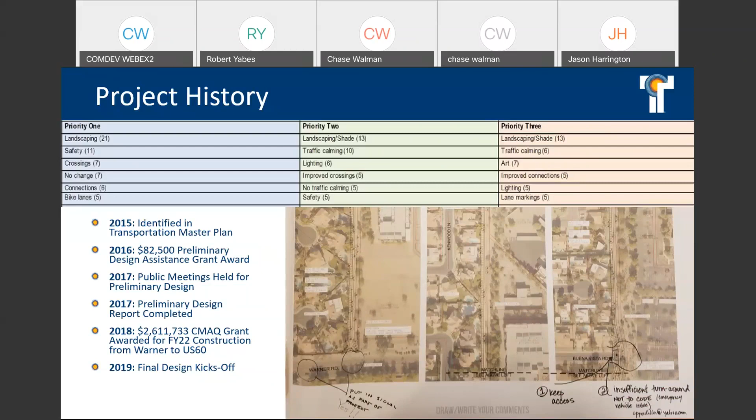So in 2018, we competed for federal construction funding in the form of a CMAQ grant, a Federal Highway Administration grant, and we were awarded just over $2.6 million for construction of the project, slated in fiscal year 2022. We started the final design in 2019.

As I said earlier, we were anticipating holding this first meeting in March. It got delayed, obviously, so now here we are in September holding our first round of public meetings.

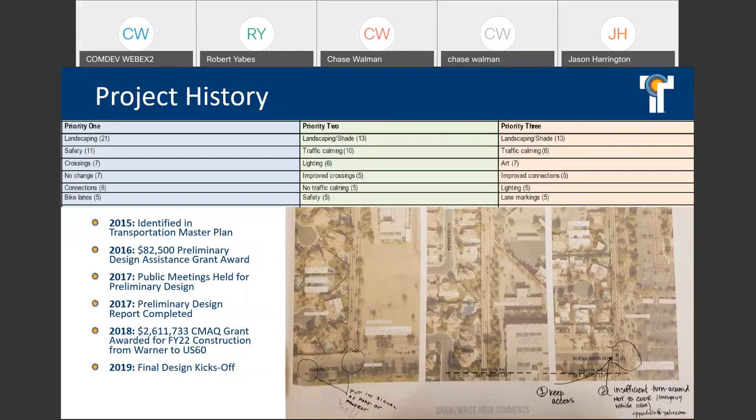This video is going to be a flyover view showing the whole project corridor, starting at Warner Road and continuing north. This is the area of ASU Research Park and the proposed future signal.

Now we're approaching Elliot Road and Shutterfly Way, near the Discovery Center. And now we're approaching Western Canal and then Country Club Way.

And now we're approaching Watson Drive. This is where we make a right turn and continue east for a little bit, going around this curve. We're now in the Optimist Park neighborhood.

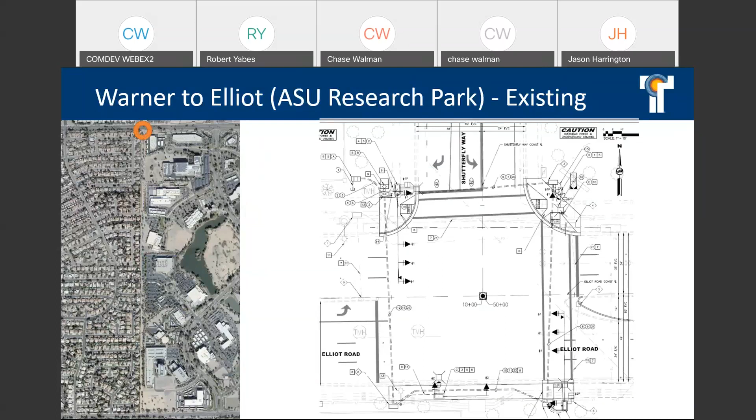The other side on Warner Road, this is showing the existing condition here. You can see a bicyclist on the right of this image trying to make the connection across, but this is the location of the future proposed signal at Warner Road, which would be in the scope of this project.

So with that, for this Warner to Elliot Road section, we have two proposed alternatives: the circle alternative and the square alternative. As you can see from the photo, the circle alternative has a multi-use path shown on the west side of that easement. It's called out to be a 10-foot concrete multi-use path, which is our city standard. In addition, it would have a buffer to the west, which would be occupied by the required lighting.

As with all of our projects adjacent to homes, as far as our specified lighting, we would include a back shield to reduce any backspill into the yards adjacent to these light poles. On the right is where we would have another buffer with an opportunity for additional landscaping, as well as an equestrian trail just east of that.

On the square alternative, it's basically a flip-flop of that. You'll see that more buffer space is provided on the square alternative, between the block wall and the concrete multi-use path, and some of the other required amenities like the lighting, for example.

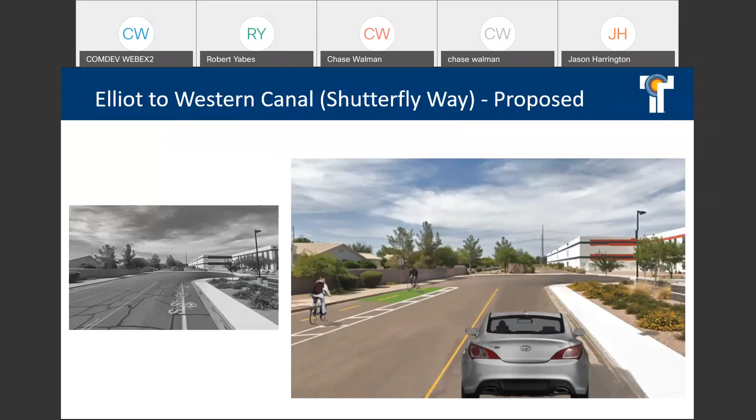This is a photo simulation of what a two-way cycle track could look like along Shutterfly Way. It would involve restriping the rest of the roadway, but would allow for a buffer space. The bicyclists would be on the same grade as the vehicles, and with this we would still be maintaining about 16 feet.

This alternative is showing what a side path could look like, taking bicyclists on a different grade, on the sidewalk grade instead of the vehicular grade, sharing a 10-foot concrete pathway leading to the Western Canal. This is a cross-section view showing the buffer space widths and the two-way cycle track.

The top alternative is not showing any striping, but it would be assumed that the existing striping to date would be maintained. This is a flyover plan view of those alternatives.

And showing the existing or future signal at Elliot Road and what that connection would look like, taking users from the east side of the street to the west side to our improvements. We would like to keep the improvements on the west side due to the lack of driveways seen on that west side.

This is showing existing conditions now, working from Western Canal, from Guadalupe Road to Western Canal. This is one of the wider corridors we have along the segment, giving us the opportunity to have dedicated bicycle facilities along this section, as well as the opportunity to introduce buffers. You can see the existing condition here of the wider corridor.

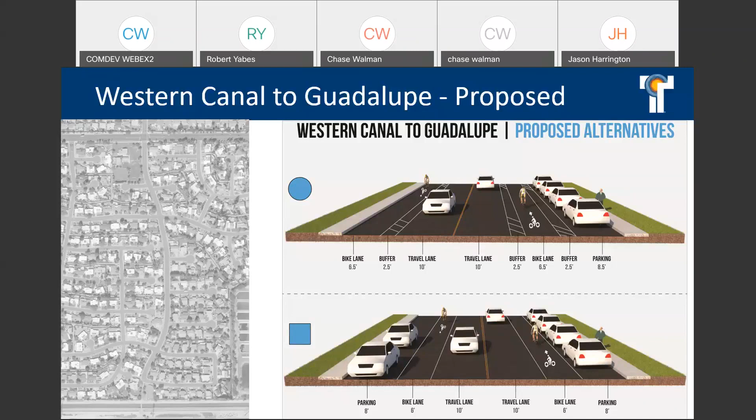We'll show a plan view of a side-by-side to give an idea of what that buffer would look like, as well as the parking on both sides of the street.

And now we're nearing the Western Canal connection on the south.

This section is our second to last section. This is Guadalupe to Watson Drive, where we have a bit more room than the section to the north, so you'll see two different alternatives here. The existing condition shows a 44-foot curb-to-curb distance, so all these improvements will be working within the current street section. Here we see two large travel lanes, on-street parking is allowed, and we also have some additional traffic calming with speed humps.

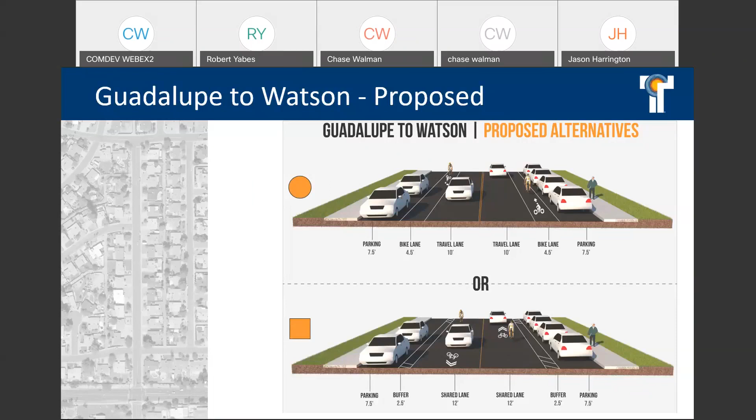Okay, going right into this is our final section. This is working from US 60 to Watson Drive. This is our tightest section where we only have 40 feet available curb to curb width, so our opportunities to add a dedicated bicycle facility here are just not possible.

So we're proposing two different alternatives that introduce a shared lane to this section, but for this section we would be maintaining both sides of on-street parking. This is as we just passed Baseline Road, and we're working our way towards the area of Fuller Elementary and Optimist Park. We have Fuller Elementary here on the right, and our soon-to-be improved El Paso multi-use path project is going east to west at that location.

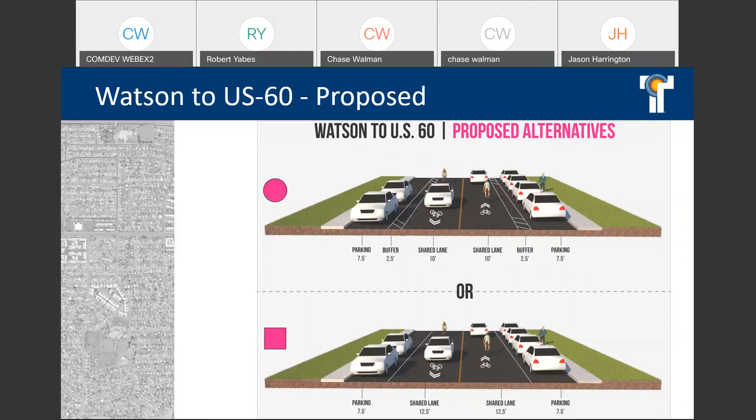So again, working from US 60 and working our way south to Watson Drive. On the right, you can see the double lines indicating the buffer zone in between the parked cars. On the left, you have a wider lane for those shared uses of the bicyclists and vehicles.

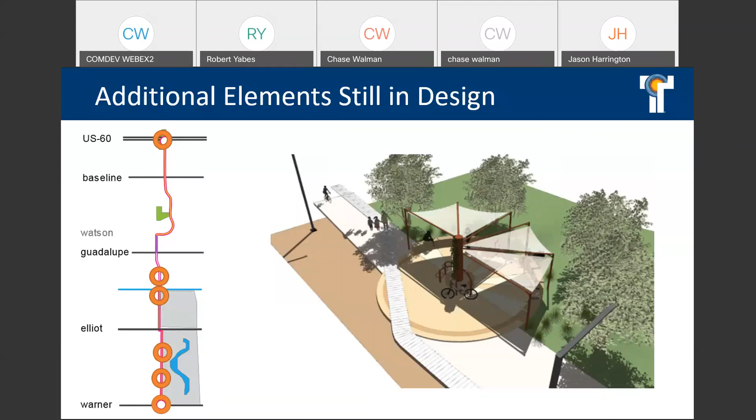Great, thanks Jason. And this is a placeholder—this is showing from one of our other previous projects what the landscape palette looked like for that project. So Jason will be working on the landscape design as well as we move forward.

So we'll be presenting those additional elements that you see in the slide to you guys when we come back for a second round of public meetings. But Jason, did you want to talk about anything as far as the landscape palette?

Yeah, with federally funded projects and areas that the city of Tempe maintains, we need to make sure that all of our plants are from the low water use plant list, so we want to make sure that they're water conservation plants. Most of them will be native as well. And then we'll also have to determine where irrigation comes from to get these plants established and maintained in a healthy order as well. So as we work through the design process beyond this 15% early concept, we'll start to fine tune that and determine where we can best provide the most appropriate aesthetics and shade.

Thanks, Jason. This is showing the potential for some traffic calming elements. This is a photo in Tempe of a raised median. We'll be looking at opportunities as well, since we saw in 2017 when we went out the priority for some additional traffic calming elements.

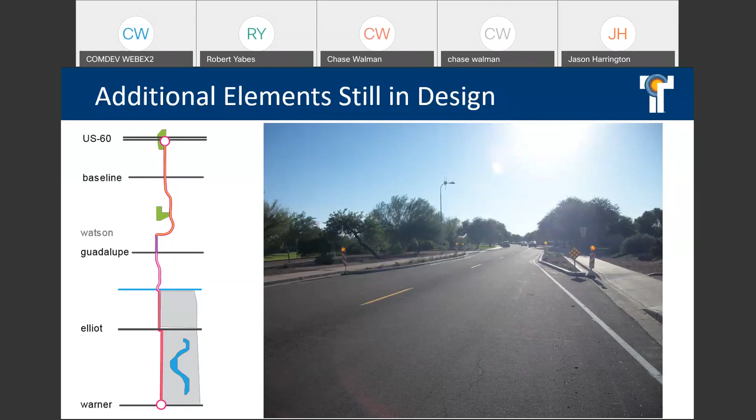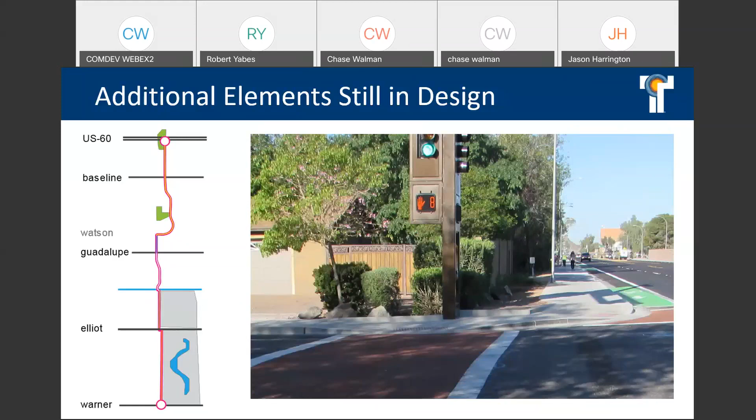We'll be looking at all potential traffic calming elements along the corridor, presenting those when we come back early next year. This shows other work along Broadway Road, including potential higher visibility crosswalks, signals made ADA compliant, improved directional ramps at arterials, and depending on the alternative selected, green thermoplastic paint like you see there.

This shows examples of wayfinding signage that could be layered into the project given it's a long corridor, as well as potential lighting, possibly solar. Specifications haven't been worked out beyond providing a back shield so the light focuses forward instead of backwards, but we'll bring more details early next year.

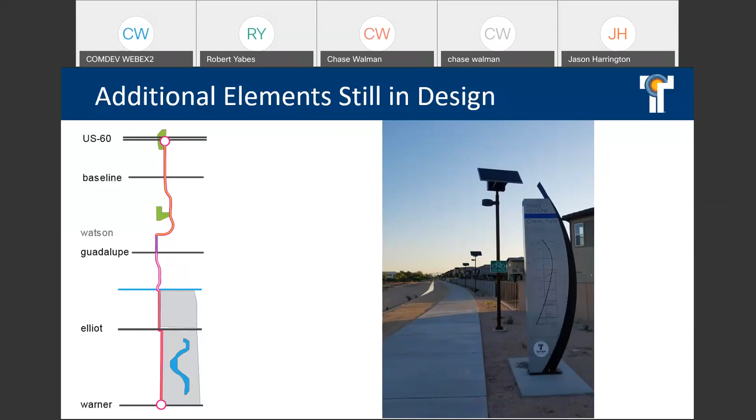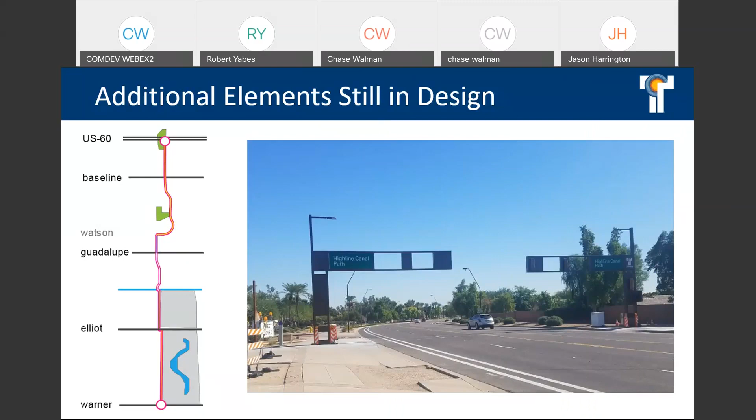Finally, with our proposed signal at Warner, this is an example of a full pedestrian signal, like our newly improved Highline Canal project with a crosswalk and full pedestrian signal, compared to what you've seen along Western Canal with flashing red lights. We don't yet know which signal type would be installed, but this shows what it could look like along Warner Road.

That brings us to next steps. We went to our Transportation Commission to collect feedback. We were supposed to come out in March, but we're here now due to COVID precautions. This is our first round of public meetings, our first opportunity for feedback since 2017. Feedback is open until October 7th for this first phase.

We'll gather all that feedback and refine the design, coming back out in early 2021 for a second round of public meetings to show which alternative was preferred and the additional elements discussed. We'll return to the Transportation Commission and possibly others like the Sustainability Commission, along with internal review from city departments and stakeholders like ASU Research Park.

We'll come back out in early 2021 at our 30% level design, getting feedback and refining once more, then finishing final plan specs and estimates in late 2021, coinciding with anticipated construction start in early 2022.